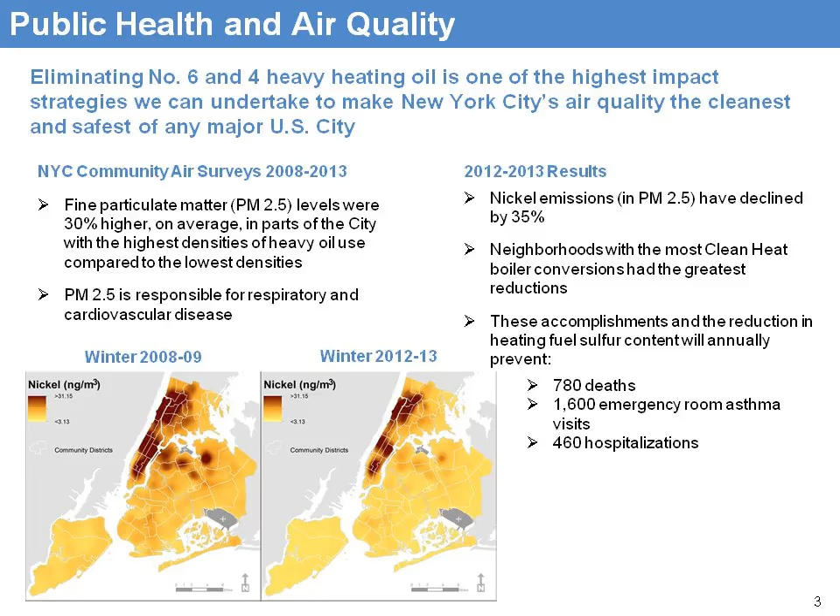Again, the main focus is to eliminate the pollution, which is a health situation, as you can see it's a cause of deaths, emergency room asthma visits, and hospitalizations.

Just to go back to the regulation a little bit, a lot of people have heard this before, and it's very important for everybody to know. As of July 1st, 2012, the DEP no longer approved certificates of operation for number 6. As buildings received permits to continue operation prior to that date, they have until 2015 to do something.

What we're going to be talking about today is let's not wait until 2015, and the reasons why. Phase 2 of the program covers those buildings that were burning number 4 or converted to number 4 — they have until 2030, or very importantly, when their boiler burner needs to be replaced, they'll have to go to number 2. So if you're burning 4, you need to realize that if your burner needs to be replaced, you're going to be told to go to 2.

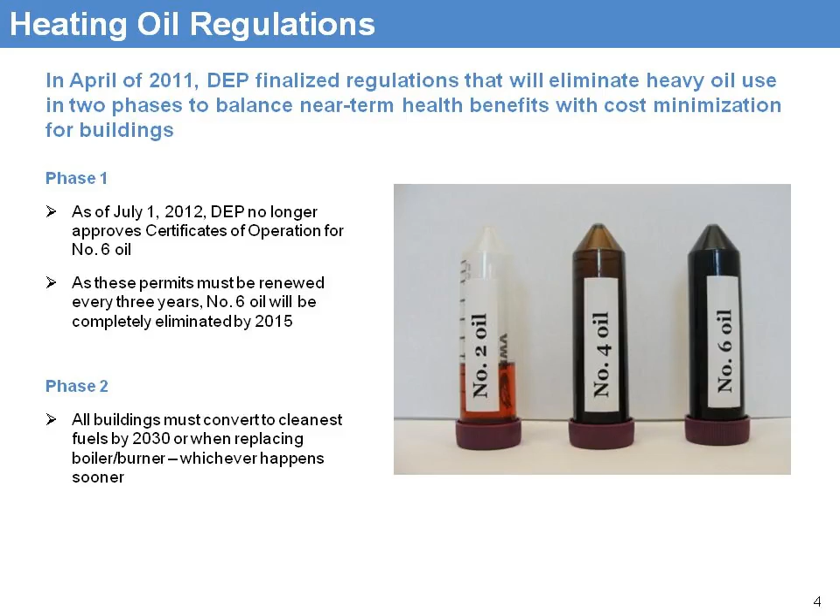If you converted from 6 to 4, then in a year or two, whenever your burner needs to be replaced, you're going to have to do it again. The Clean Heat program is a fuel-neutral program.

Our mission, again, is to clean the air, and we're doing that with the elimination of number 6 and number 4 heavy fuel oils. Your options are to go to any of the cleaner fuel oils: ultra low sulfur 2, biodiesel blends, natural gas, steam, or geothermal if that's something you're looking at. Also solar or cogeneration — anything that reduces the amount of emissions being emitted into the air.

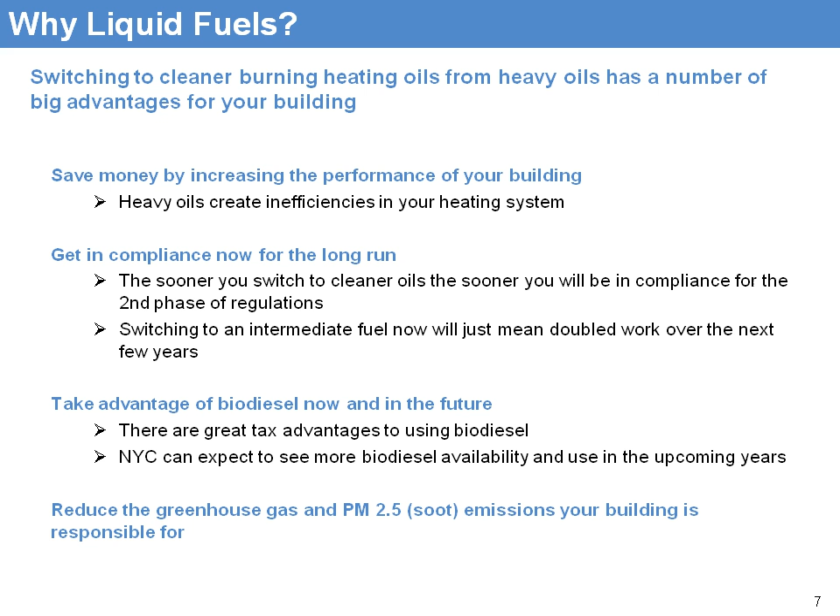Now, the use of biofuel is also very good. It aids in a more cleaner burning system, and I'll get to that a little bit later. Main goal: reduce the greenhouse gas and the PM 2.5 emissions your building is responsible for now.

So this is where we start to get a little fun. I'm going to throw my engineering hat on. I have fun with this when I'm talking to people because some people may not understand this, and maybe some people do, so that's okay. I'm going to go over it anyway. Your boiler - this is very simplistic - there's a fire side and the water side of your boiler. You see your burner, your oil tank, your side-arm heater and your preheater.

Now that diagram up there, a clean tube sheet, that's your heat exchange element within your boiler. Your flame heats one side, the hot gases go through those tubes and heat the medium, which is the water on the other side of those tubes, to a specific temperature controlled by your thermostat. So the tube sheet separates the heat from the water that is made into steam for heat and domestic hot water. This is where the heat transfer occurs - this is going to be the gist of the whole presentation right here, what's happening at that tube sheet.

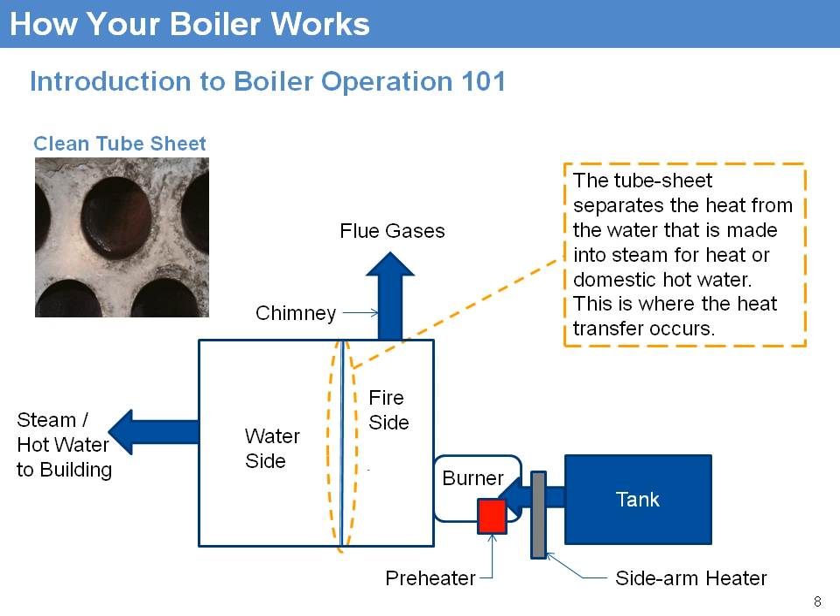So the U.S. Department of Energy - I'm not making this stuff up - indicates that a clean heat transfer surface can improve system efficiency. These contaminants impede the efficient transfer of heat and reduce the efficiency of heating systems. What does that mean? A clean surface of the tube sheet provides maximum heat transfer. As soot is built up on the tube sheet, heat transfer is diminished, resulting in loss of efficiency. As little as 1/8 of an inch of soot can reduce efficiency levels by 8.5%. Now that's a clean tube sheet on the top, and that's a dirty tube sheet on the bottom.

Now, obviously, it doesn't all lay flat on your sheet, but it also penetrates into your tube. So when you have a cleaning done by your maintenance contractor, if he's not getting all the way into those tubes, which actually exit the other side of the boiler, you still have an insulating layer. Now what happens with the soot is it creates an insulation barrier. So as this barrier increases in thickness, it takes more fuel to do the same amount of work. I'll explain.

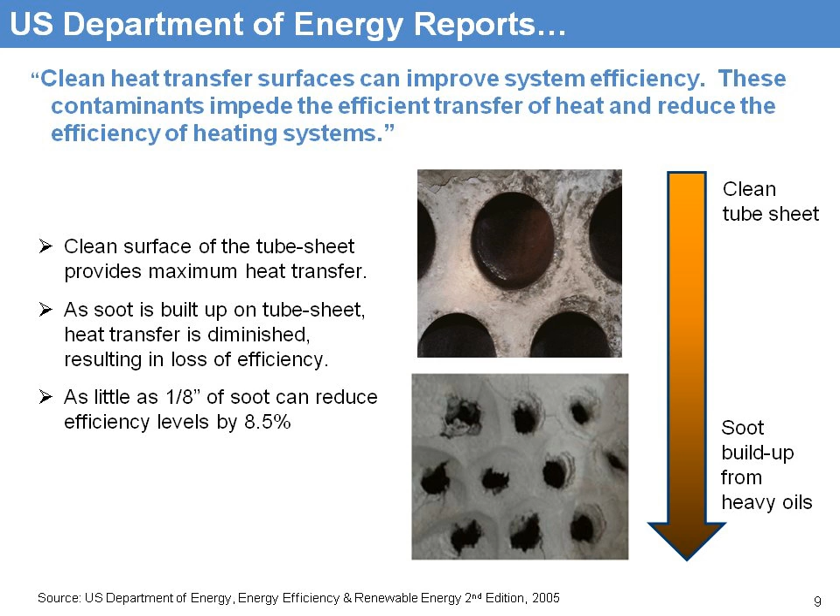But first I want to talk about what you're burning in your boiler. Now I saw some people that were burning number 6, but again, there are a lot more trades that are in this presentation, which is great. But in number 6, the product is very thick in its natural state, and it must be maintained at approximately 100 degrees Fahrenheit in the tank in order to flow. In addition, a sidearm heater and a preheater are required prior to the fuel being injected into the boiler. High levels of maintenance are required, and the preheater is an electrical component. I'm going to focus on that later, so please keep that in mind.

Number 4 product is not as viscous as number 6, and it's comprised of a blend of 47% 6 and 53% 2. A preheater is still required. Maintenance is still an issue, and the preheater is an electrical component.

Now we talk about ULS2. It's the same grade of fuel as the automotive application. The only difference is its color. But the parts per million through the new refinement has brought it down to 15 parts per million, making this a very, very clean fuel. There's no preheating required, and the maintenance is very low because of the cleanliness of the fuel. And then, a good thing about this, increased purchase potential to secure the best price for your building.

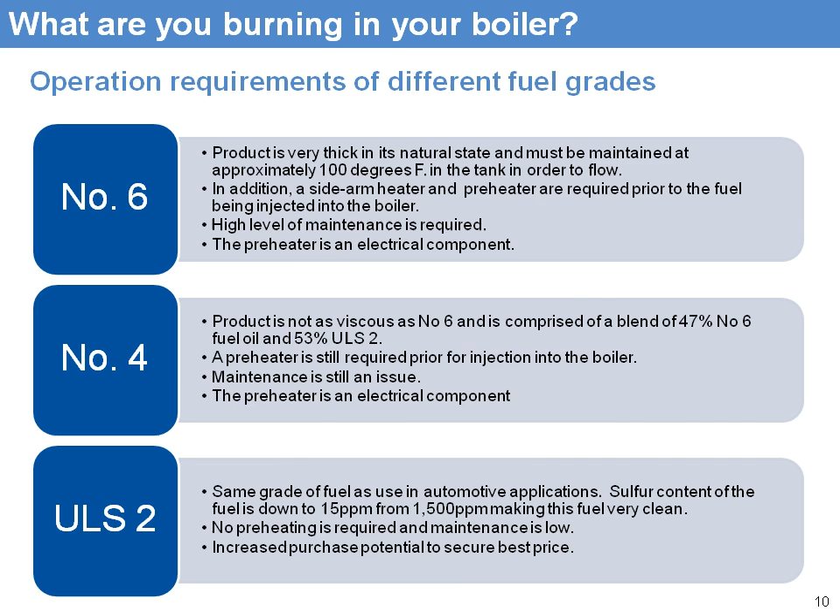So now we're going to break down the boiler in this operation. This is a layout that you've seen earlier of a number 6 fired boiler. The fuel is delivered into the tank, from the tank to the burner, and it needs to be preheated to allow the fuel to flow in addition to the required sidearm heater. Now, when you burn a number 6, some of the energy that's being used per gallon is transferred to the tank and then through the sidearm heater. That's where the energy to keep the tank at 100 degrees comes from.

So next, the flame created by the burner burns fuel. Soot deposits are created on the tube sheet. Now this happens over time, and as more time passes, there's more soot that builds up. So it's not a linear progression. Well, actually, it could be a linear progression of inefficient operation. The increase in soot buildup results in elevated flue gas temperatures and loss in efficiency.

Your super of the building may use this as a gauge, that the temperature has risen this amount of degrees, so therefore now I know I need to clean my boiler. And that's the indication as to when that happens. So that's a key indicator to the building as to when they need to do that. With number 6, it's going to happen often and more quickly than the other fuels.

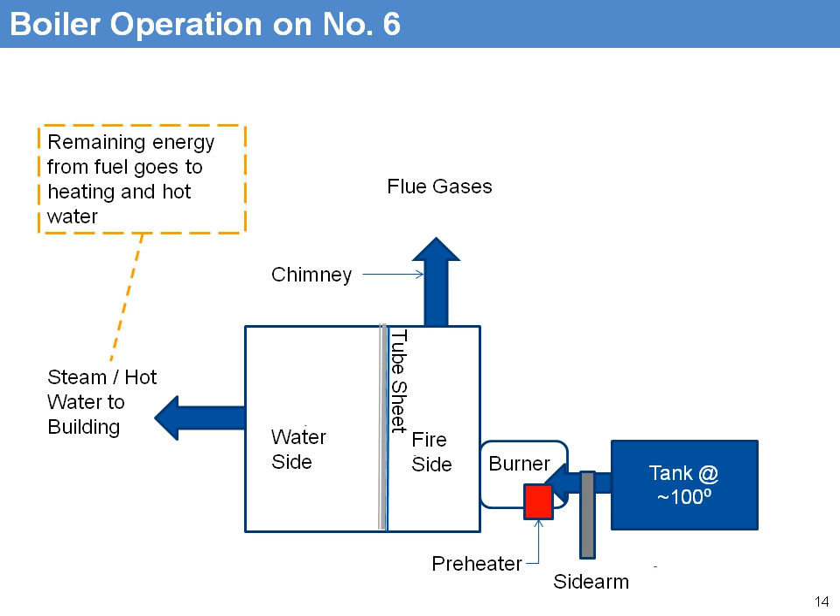Now, the remaining energy from the fuel goes to heating and hot water for your building. So in this scenario, basically what happened is as the soot built up, it required more fuel to do the same amount of work. And that's what we're talking about here. What are you really paying for?

Soot buildup on the tube sheet occurs quickly due to high viscosity and density levels of the metals inherent in number 6. The buildup decreases operation efficiency as deposits thicken. The result, normal operation requires more fuel to heat the living space within the building. In addition, electricity and fuel are used to keep the number 6 at 100 degrees.

Now, here we get to some numbers. I took an example of a building at 73,000 gallons of number 6 fuel oil. We have a calculator that we use to talk to building representatives if they need to understand the comparisons. And I kept the pricing at 10 cents per grade difference. So in this scenario, we're looking at number 6 to be at $2.90. Now again, these are all just comparisons. These are not engineering studies, but the results of the study indicated that under soot-free conditions, this same building should have only burned about 63,000 gallons.

That's 10,000 gallons additional fuel that was used to bypass the soot buildup and heat the tank, which could be minimal, but the most inefficient loss is in the soot buildup. DOE indicates that, I'd say, 1/8 of an inch is 8.5%. 1/4 of an inch, if you put your fingers together and figure out what 1/4 of an inch is, that's 16% inefficient operation. So basically, you've lost $29,000 in fuel, and your electric preheater at approximately $10,000 per year. And those are the assumptions I use, which I've run by many people, and they're sound assumptions.

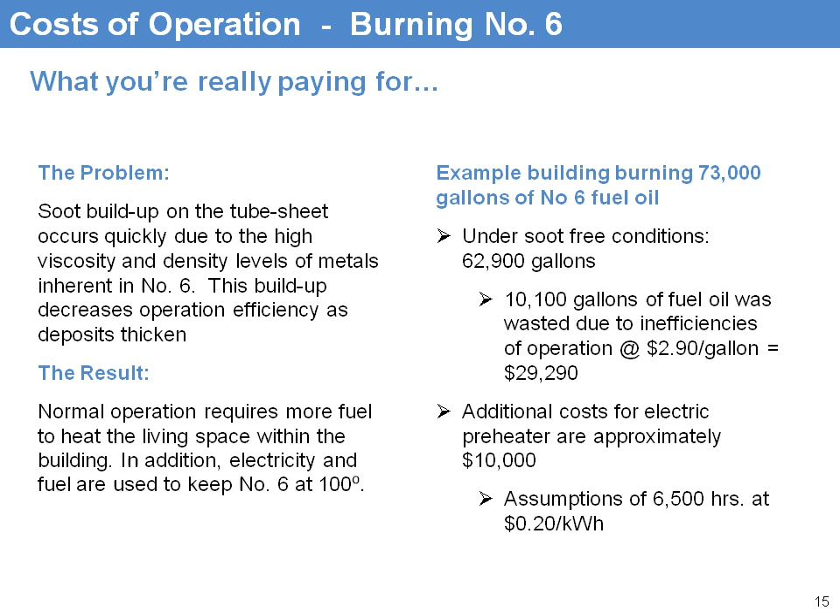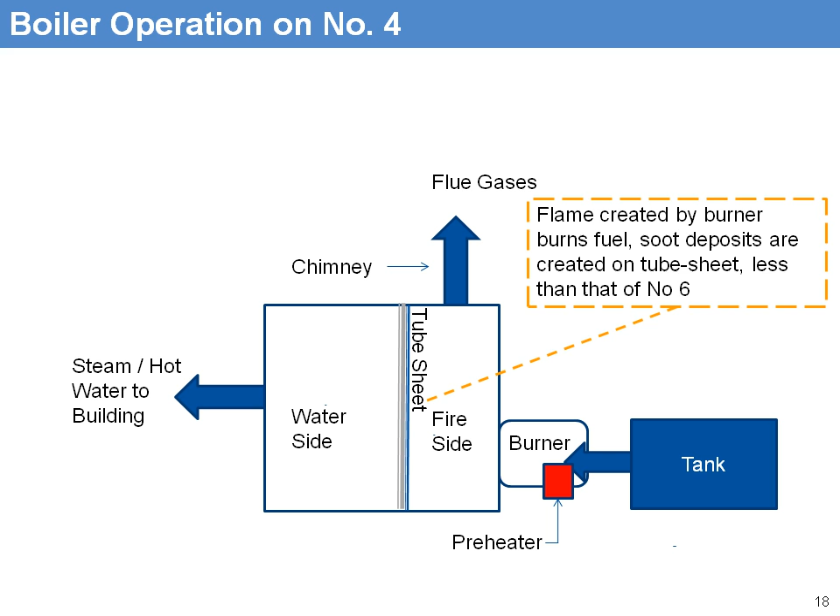Let's talk about number 4. In this particular case with number 4, you don't need to maintain temperature in your tank, and your side-arm heater is removed. So that's good. You still have a preheater, which is that $10,000 number that I just showed you earlier. Similarly, the flame created by the burner creates the deposits on the tube sheet. Not as quickly as 6, but they're still there because of that 47% number 6 volume in the fuel oil per gallon. Again, increase in soot buildup results in elevated flue gas temperatures and loss in efficiency.

If you could visualize a flame that's aimed at the tube sheet, but some of that flame can't get through to the water through heat transfer, that flame is going up your stack. So that's how the losses could be visualized. Energy from fuel goes to heating your hot water, and steam and hot water to your building. So again, we want to see all that energy doing good heat transfer work to get to the water. What actually happens in that case, once the temperature is satisfied with, say, the thermostat, simplifying it all, then it stops operation, it stops burning. So you have less fuel that's being used to do the same amount of work.

Again here, similar slide, but what are you really paying for? Number 4 is a blend of 6 and 2. The density levels of the metals found in 6 are reduced, but still exist. That's still almost 50%. Therefore, the soot buildup on the tube sheet occurs, but not as quickly. And this buildup leads to gradual decrease in efficiency as deposits thicken. More fuel is required to heat the living space. In addition to fuel having a lower heating value, that's the BTU that people talk about. Oh, this fuel has a lower BTU value. Yeah, that's true, but it's not a large percentage. Numbers that I work with say number 6 is 150,000, number 4 is about 145. Again, I'm simplifying this, and number 2 is about 138.

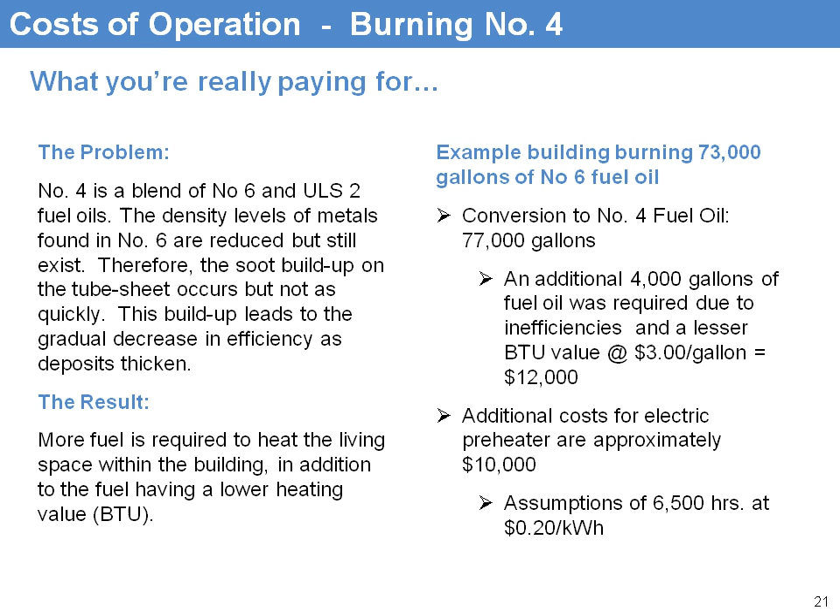So in the example, a building burning 73,000 gallons, conversion to number 4 from 6, since you have the same amount of soot buildup, maybe just a little bit less, again, this is just a comparison. Now you're looking at 77,000 gallons in usage, and that's because now you do the conversion from the 150 to the 145,000 BTUs. You actually now, to do the same amount of work, are using an additional 4,000 gallons. In this example, I'm using a 10-cent difference. So now you're at $3 a gallon, you're using, in addition, a $12,000 difference than what you should be if your system is burning clean. You still have that electric preheater at 10,000. And these are my assumptions, 6,500 hours and 20 cents a kWh. So you're using a little bit more, you're paying a little bit more. The perception is that you're saving money. So hopefully as we go through this, you'll have questions.

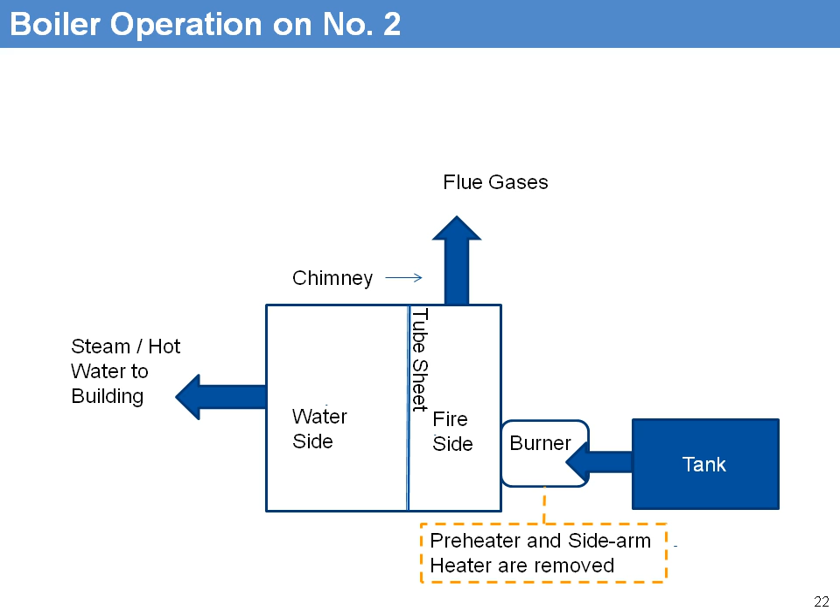So now your boiler operation on number 2. Both the preheater and the side-arm heater are removed. You don't have to keep the tank warm because the fuel oil, like I said, it's automotive grade. It's liquid. No viscosity at all. So again, fuel is delivered to the burner from the tank. And then the flame created by the burner burns fuel. Soot deposits are minimized. I'm not saying it's not going to happen, but they're minimized due to the clean operation of the system. I talked about 1/4 of an inch, I talked about 1/8 of an inch. I calculate about 1/32 of an inch, again, using DOE standards for soot buildup when utilizing number 2. And these were also verified through some tests that I had done with real buildings in the city, just to get a sample of what we're talking about is actual.

Decrease in soot buildup results in maintained flue gas temperatures and maximized heat transfer. What we're saying here is that you can go longer between cleanings when you're burning clean. And people do say that: I'm burning 2, I only clean my boiler once a year. That's great. Some people say that they're cleaning the boiler 2 or 3 times a year if they're burning heavy fuels. What I'm saying is, why spend the money on maintenance? Clean it once and burn clean and save money.

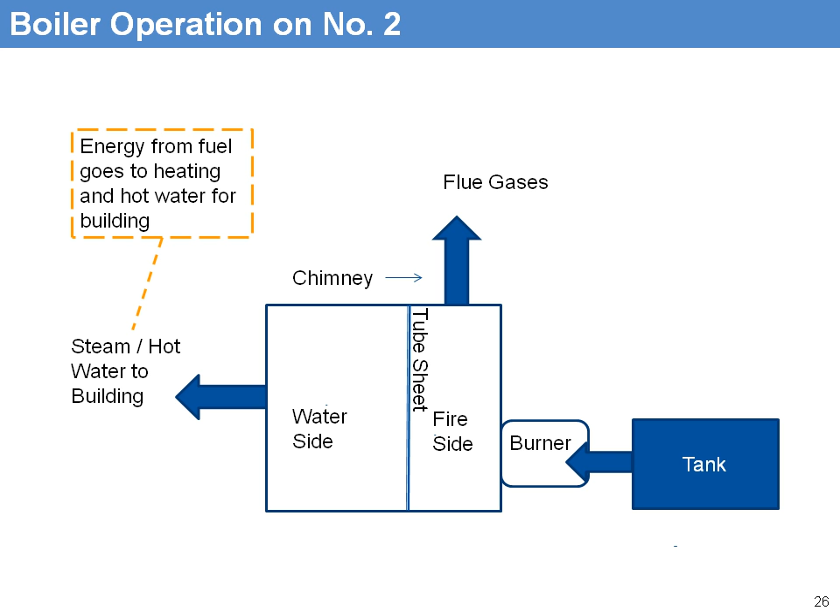Energy from fuel goes to heating and hot water for your building. So saving money but using an efficient fuel. Here are the characteristics due to the cleanliness of the ULS2, and that's really number 2, but now since it's been refined, it's now called ultra low sulfur number 2. The metals inherent in the heavy fuels are gone. You do have some soot buildup because it is a fossil fuel, but not at the rate that you would with 6 and 4. What's the result? The lack of soot buildup allows for normal operation, and it requires less fuel to heat the living space, regardless of the lower BTU value.

And what's also nice, and I heard this from the building that just recently converted, is that they don't have that strong odor during the delivery. You're still going to have an odor, but it's not as if you were getting a delivery of 6 or 4.

In my example here, still looking at the same 73,000 gallons through my calculations. Due to efficient operation, the reduced amount of soot buildup, the gallons in usage after the conversion is only at 71,000 gallons. Again, using a 10-cent increase in price, the building is actually saving $6,000. There's no electric preheating required. There's savings on that end of about $10,000. And so these are the benefits of going number 2.

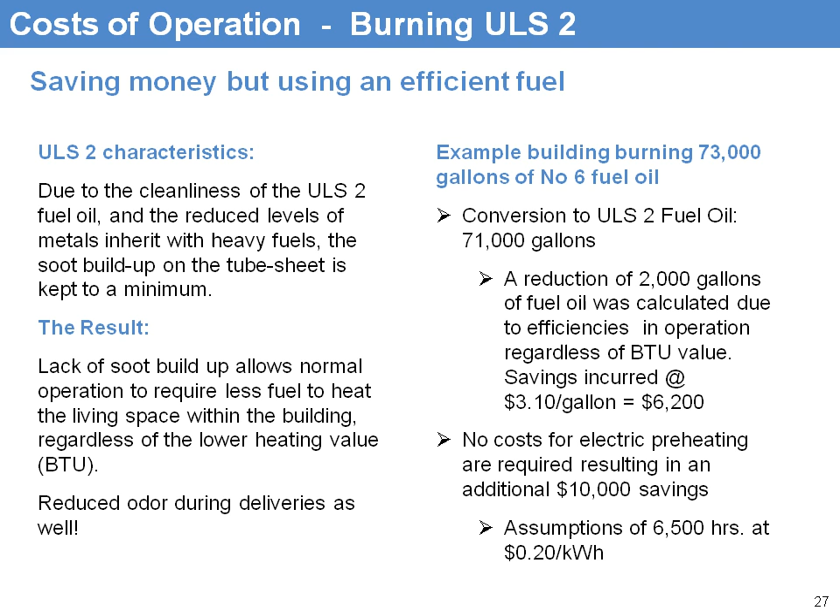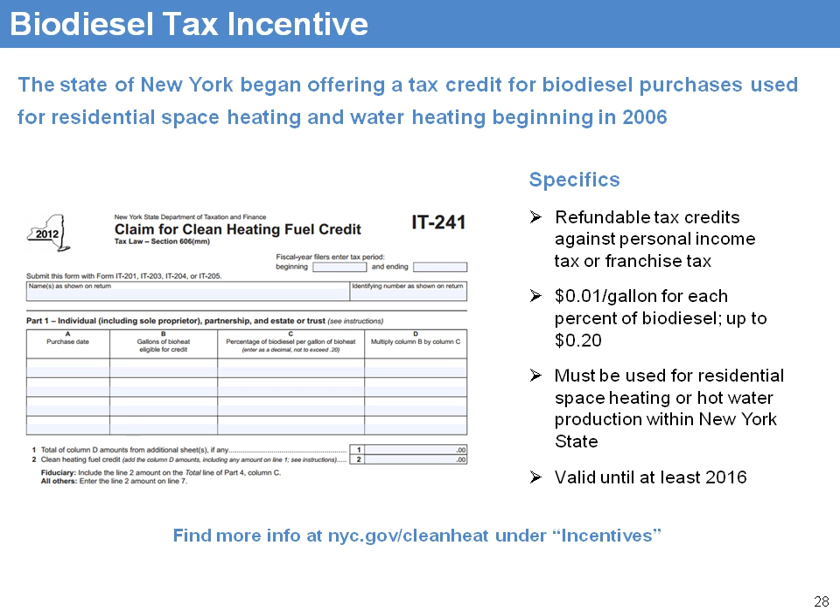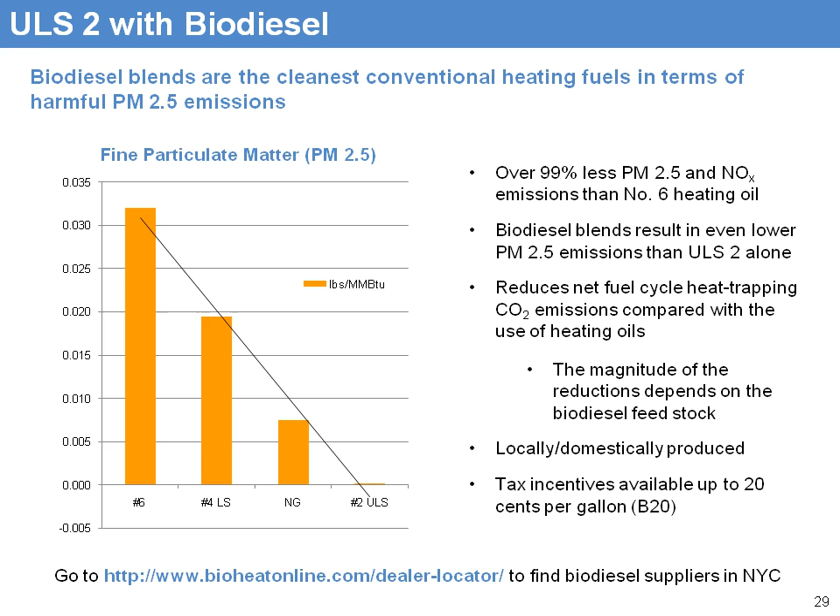We're looking at moving buildings from 6 and 4 to natural gas and number 2. But you can see from this chart here that going with the number 2 ULS, ultra low sulfur 2, reduces the particulate matter over 99%. When we look at PM 2.5, it's actually cleaner than natural gas. Obviously, natural gas has lower greenhouse gases, but we're looking at the metals and the sulfurs that are being emitted into the air. So going to number 2 is a really good thing for the city and for everybody who lives in the city. If you live in the city, you are breathing the air that these buildings are emitting everything into.

As I said, if you're in the midst of doing a conversion to gas, that's great, but don't wait, and look at your project in 2 phases. Get rid of your burner, put a new burner in, clean your tank, make sure you test your tank, and then put number 2 in there. And then, when you've converted, you're ready to go.